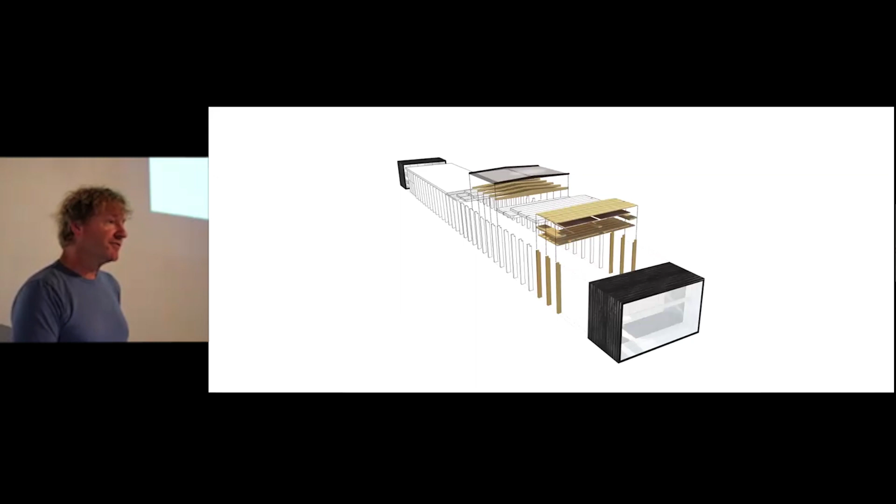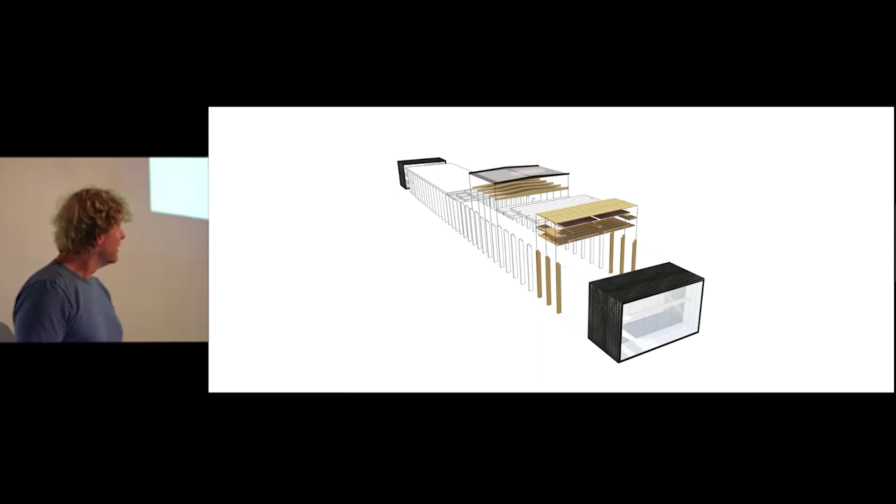It was also the beginning for us of panelization, learning how, in this case, we could build these 12-foot by 30-foot panels offsite, complete with insulation and electrical built in, these very flat, shallow truss-like panels to build a building. And of course, it's not tall.

So at the same time, as I'm lecturing around the world, I end up meeting and honestly totally fall in love with this guy named Andrew Waugh, in an appropriate way, especially because Andrew's daughter's here. Andrew became an incredibly good friend of mine, and he was lecturing alongside me, talking about wood.

In 2008, 2009, he built this building, which is the first tall wood building, a modern tall wood building, and a really important milestone. It was built using Austrian wood. Andrew's coming to tell this story, so I won't tell too much about it, but it was a really instrumental moment for the industry. For me personally, it was the beginning of both our friendship and our relationship, but also an understanding that we were already starting to explore tall, but in a very different way than Andrew was.

This building is built as a platform-based building, meaning the floors go on and then the walls, and the floors go on and then the walls. That's kind of how we build wood frame construction. But I live in an earthquake zone, right? The West Coast is a heavy earthquake zone. And that system of building wasn't going to work for us as we went higher than 6 to 8, 9 stories. So we knew we had to come up with a very different system in order to build in our seismic zone.

That was what began this book we call The Case for Tall Wood Buildings, explaining the reason why we should build it. And we developed this system that was balloon frame, meaning the walls go up many floors and the floors are hung between, which becomes really important as you go taller and taller, because wood shrinks.

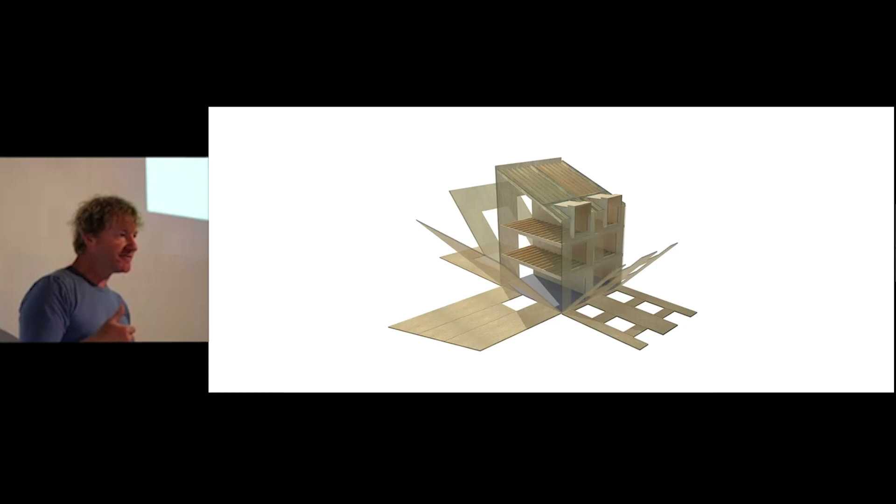So we wanted to say that this material - apologies to the Skyscraper Museum, but we're going to get there - we wanted to show this idea of FFTT, that these systems of building using CLT would work at all different heights and have a reason at all different heights. This was a chance to say in an institutional building that needs to last for generations, CLT made sense. So we tilted up these walls vertically, like again a balloon frame, and then hung floors of light wood frame to keep the cost down because it wasn't tall.

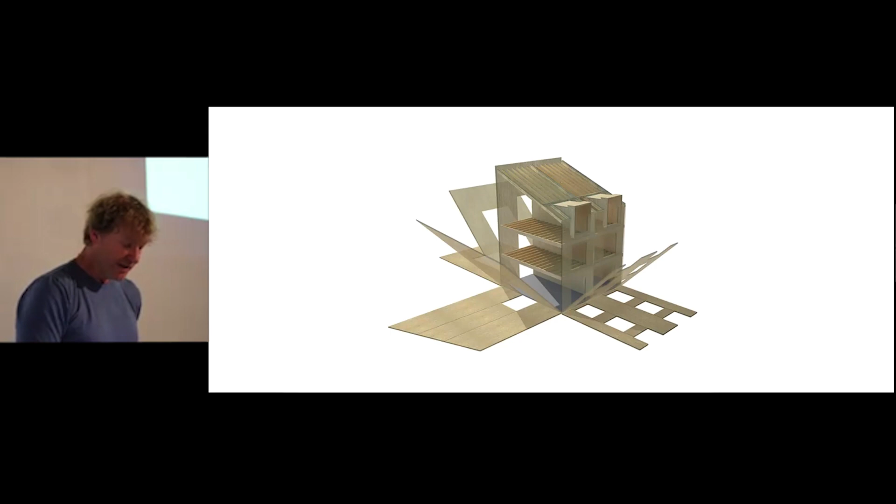For us, this was a very instrumental turning point of understanding that these systems could be economical. We could actually achieve them and achieve the architecture we wanted, including brick on the outside. So we weren't married only to the idea of putting wood on the outside of a wood building.

But then it came to this big question. A bunch of people in the room are starting to really germinate on how we're going to get this movement to work. And I'm sure those like Thomas and others in the room that have experienced this - everybody says that can't be done, our industry is a massive ship that cannot be turned, there's no changing the way. The industry largely hasn't seen any major innovation in a century. It's kind of embarrassing - every other industry sees massive innovation. We pretty much built buildings the way we did a century ago. And yet we are so responsible for so many important issues, from social to climate and so forth.

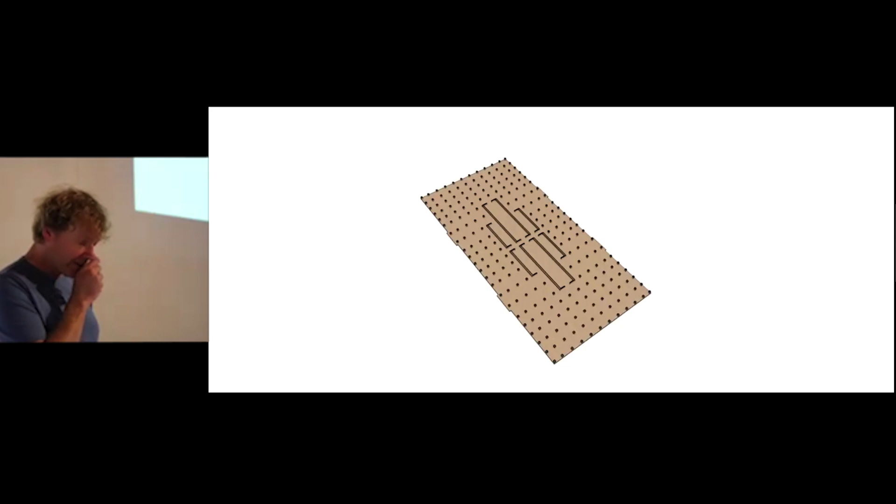So turning the ship became the big question of how to do it. And there was a real life lesson in it - that was to find tools to tell the story. We were approached by a Finnish company, Metsä, who make laminated veneer lumber. They asked us, as part of their program, saying we'll pay you a bit of money.

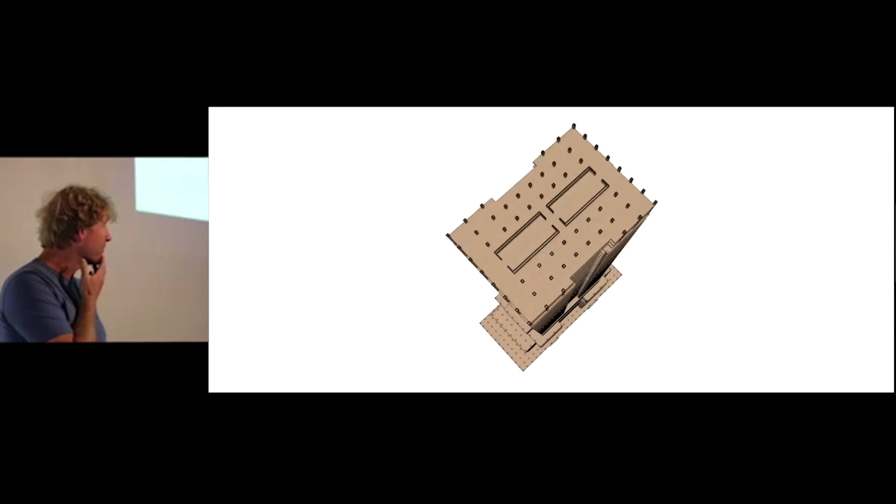Could you sit down with your engineer, Eric Karsh, who's going to speak as well. He's a very important engineer, a good friend of ours - he shares office space with us in Vancouver.

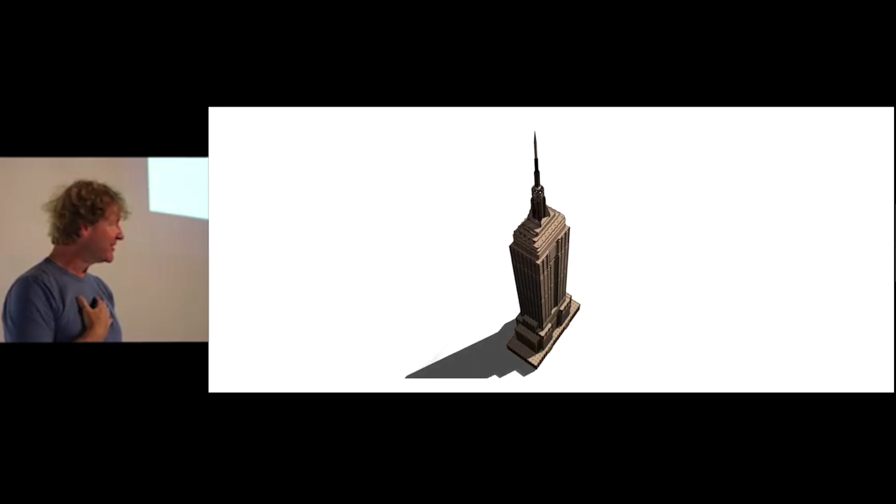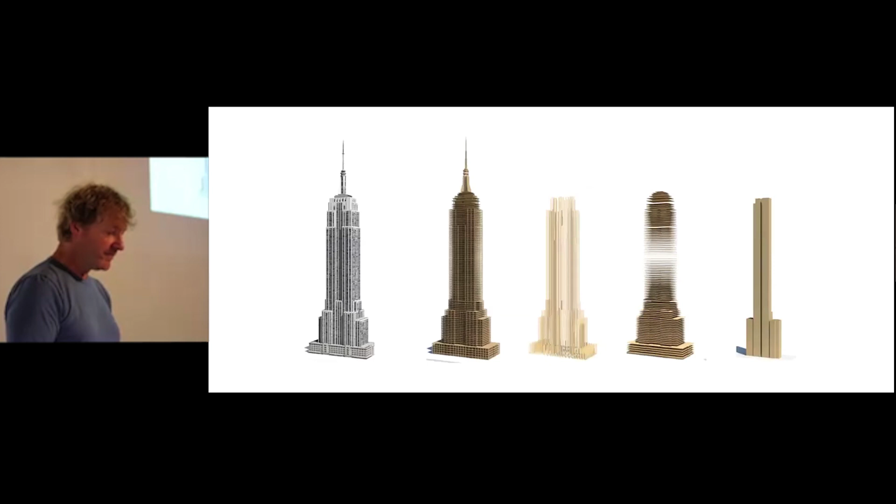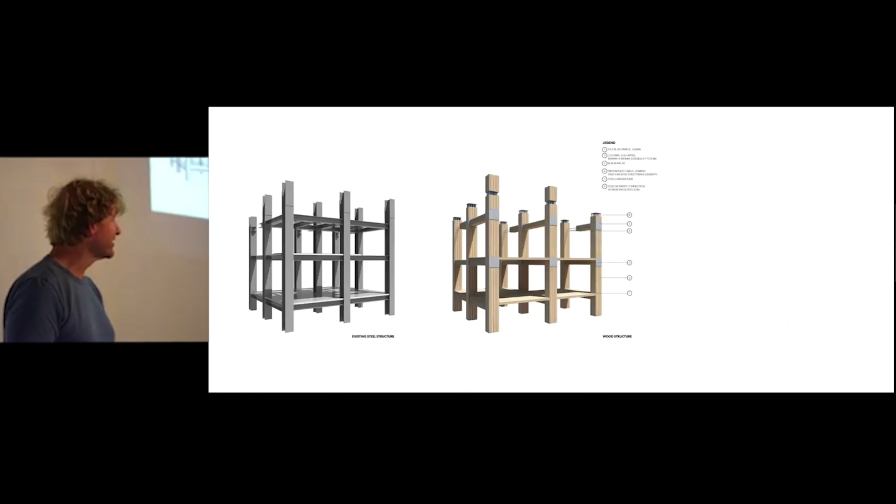Could you have built the Empire State Building entirely in wood? What we found is we definitely could have, which is kind of crazy to think about. We did a pretty detailed engineering exercise to prove it out, coming up with a concept of post-tensioning laminated veneer lumber sections. We did pretty detailed drawings of it, and in that process, what it allowed us to do was talk to the mainstream.

The big thing about skyscrapers, the reason this is such an important part of this movement, is that it's not just about tall, it's about more, it's about bigger, it's about more urban. The breakthrough of any new technology has to be inspiration. It has to stretch your imagination of possibility, and tall does that. When you want to build a 10-story building with this new technology, it's still scary for people until you realize somebody built 60 stories. All of a sudden that takes the fear away. There's a whole history of how this worked, even in the beginning of skyscrapers a century ago.

In my TED Talk, I'll talk about how people were terrified to walk under a 10-story building, the first tall building in Chicago, because they'd never seen anything like it. So that fear is something we had to overcome. Tall was a way we could show that if we could build the Empire State Building, if we could show with some real examples, like we see in the room here, then we could actually get people really comfortable with any other height with this material.

The breakthrough is going to be about tall, and really the inspiration of the dialogue between the Chrysler Building and the Empire State, and the competition, the spirit that developers feel about being a little bit taller, and all of the things that this museum are about, is really what also pushes innovation, pushes engineering higher and higher, to create this great comfort with change. These tools for us to be able to tell the story became really important, with cute little things that help get the everyday person kind of adjusting to it.

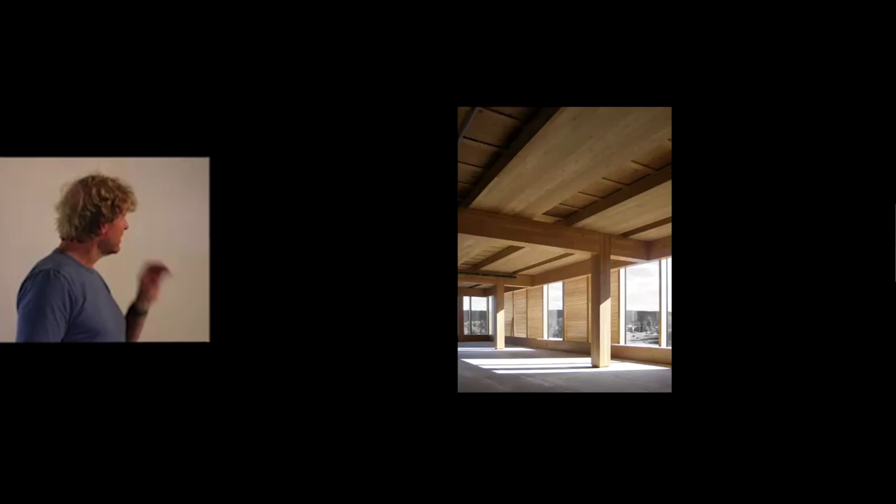And we developed a system of staggering CLT that allowed us to hide all the services in the building's floor sandwich, which was really cool, except we've never actually done it again. But it taught us a lot of lessons. Part of the lessons are these buildings are different.

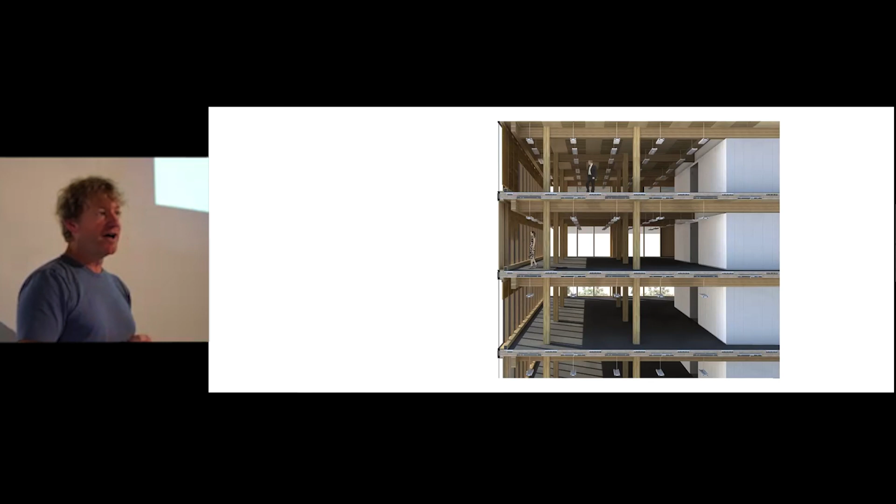The process is different. You're not saying to the engineer, make the structure, and then saying to the mechanical, figure that out. It's day one with structural, mechanical, electrical in the room, collaborating to figure out how all those things work together, because you want to show off the beauty of that material. This was the first building for us to really deeply understand how integrating into the structural system meant that...

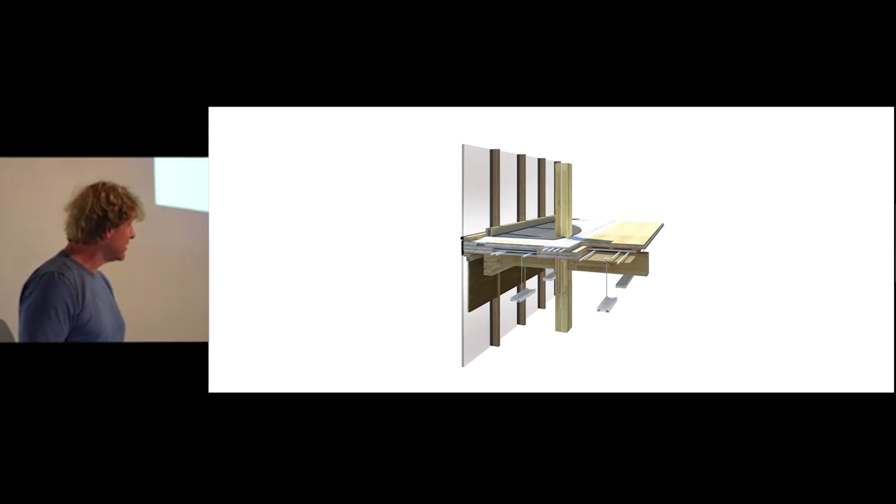...we were actually thinner as a sandwich than a conventional concrete building. But we could do it in a much more beautiful way, and obviously a much more impactful way from a climate point of view. Even the core CLT, this is the first use of CLT made in British Columbia. And even the exterior is wood, which is really unusual. We actually charred the wood in the Japanese technique to prove that the flame spread on the building would match steel or a non-combustible exterior, which it barely did, but it did.

What we found, though, is more important, which is we did a bunch of studies and we found that it was an 88% reduction of carbon over doing it in concrete. And we now have, and the North American forest grows enough wood to build it in 4 minutes, and those are really great storytelling devices, but that 88% is the point.

So as Carol mentioned, I ended up getting this request to speak at TED. The single most terrifying thing I've ever done. Bill Gates was in the front row, down in the shadows there. And yet it was also the single most important thing for us as a practice, but also in this movement, because there's very few ways architects get to tell a story that can reach this many people.

The piece I didn't really understand is the importance of translation. TED has volunteers that do all the translation, and it's random what countries or languages they translate it to. But my talk's in like 40 languages now. I had translators come up to me at subsequent TEDs - one woman said, Michael, I translated your talk into Albanian, and now we teach about wood architecture in Albanian architecture schools. You realize the power of language is so important. This has largely been an English language conversation, but TED opened it up to the world and to many more people, which was really huge.

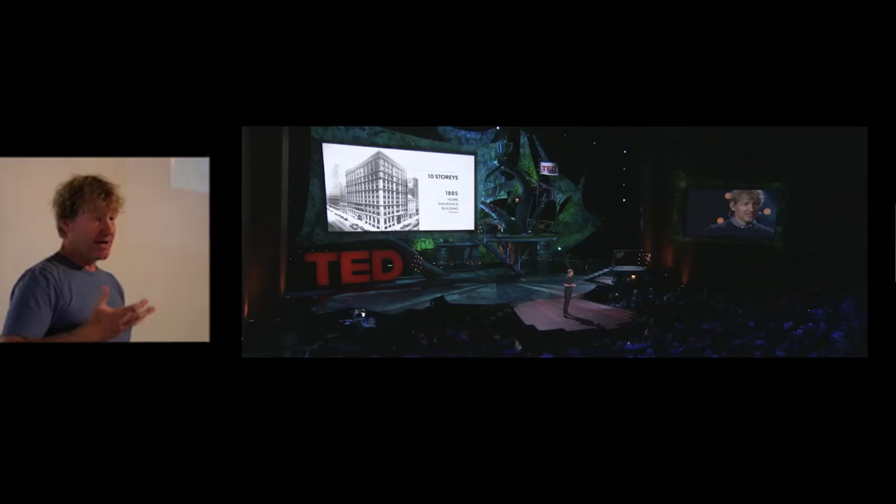So as a movement, it was really helpful. And Carol mentioned, as a Cornell grad, I used this Roosevelt Island project I knew they were about to build to suggest that if you're going to build a high-tech campus in New York City on Roosevelt Island, you need to build in the most technologically advanced material on Earth, which is wood. It always pisses humans off that we don't have a patent on this material - that's the way I tell the story, and it's so true. Mother Nature is so much more sophisticated than we are. So I use these as just examples, and they didn't go anywhere.

And I talked a lot to New York as a city, tried to talk to Bloomberg's office at the time, and because of fire, it was largely a non-starter conversation, unlike Paris. So the mayor of Paris at that time started asking me to come over and speak a lot in Paris. Why that really mattered was Paris had always been historically the number one tourist destination in Europe. But around that time, London had been investing so much money into culture that London had flipped the story and become the number one tourist destination. So Paris was kind of desperate to figure out what are we going to do different. And they also hosted COP21.

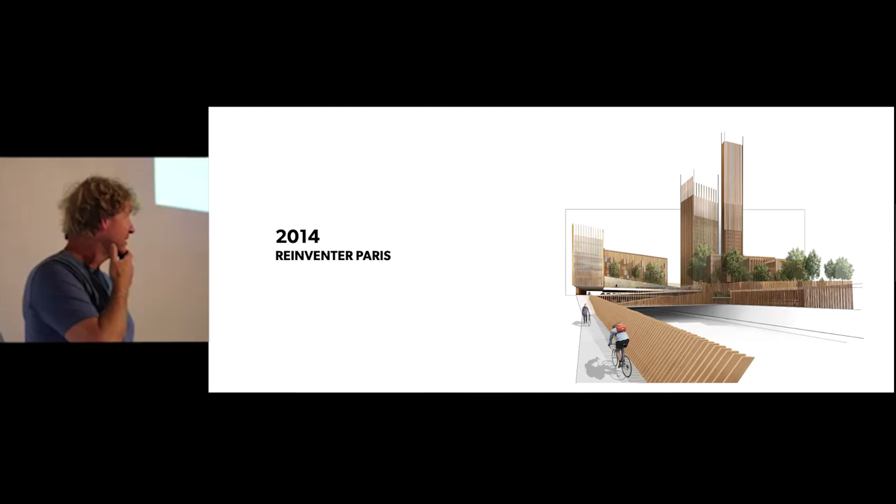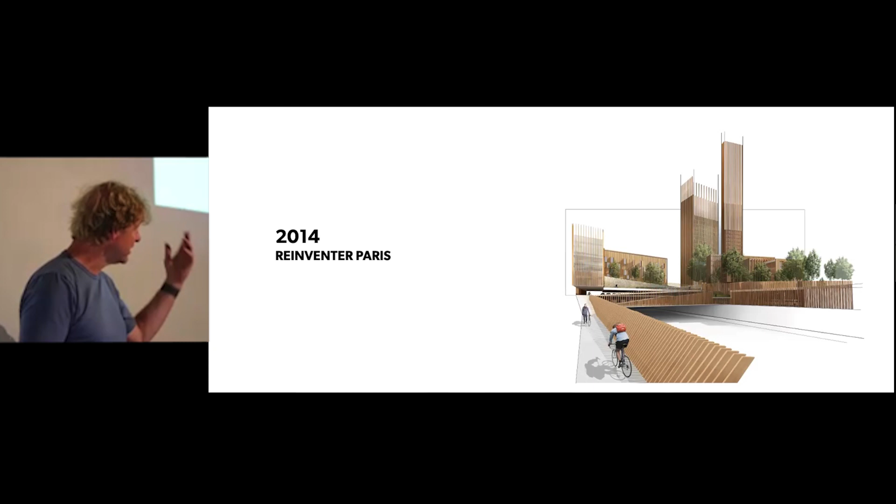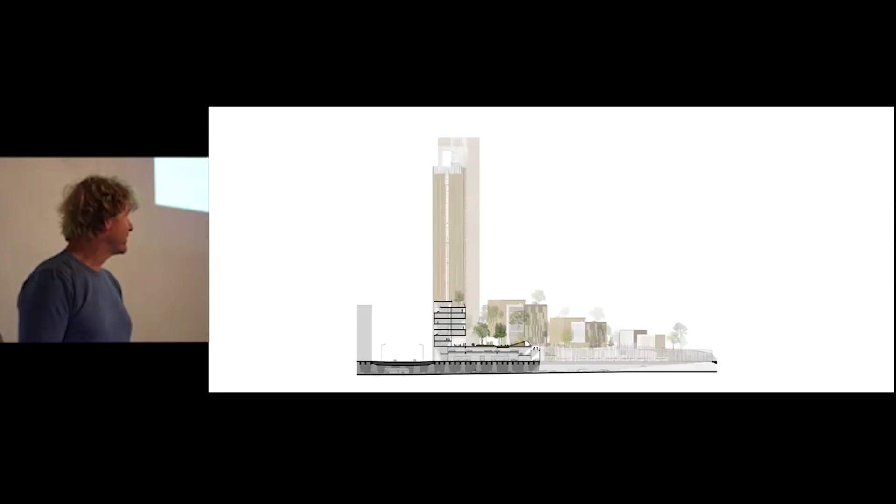So when COP21 happened, they started thinking about how this idea of building in wood could be part of the story. We submitted a competition entry for this crazy tall 34-story building. We did not win - you can see the Eiffel Tower in there. But for us, it was the beginning of being able to show in pretty good detail designs that would get us stretched up into these huge heights. The little blob on the top there is the Eiffel Tower. This was built spanning the periphery, the main highway that loops around Paris. It was a pretty crazy big project. But we didn't win, and it kind of scared the hell out of Paris.

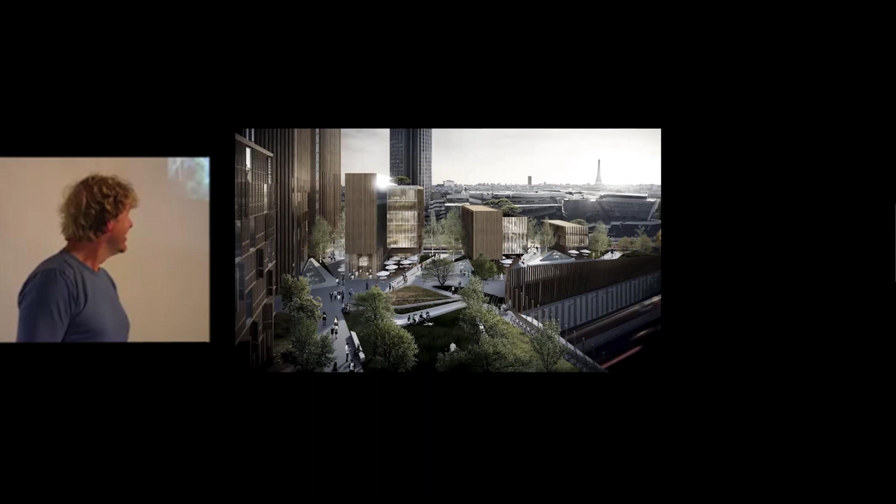But enough that Paris decided this is going to be a thing. And I would argue that for the most part, they're building more mass timber than anywhere on Earth right now, even though they have wood there. So it's ironic that when you politically have that momentum, it means that you actually see change happen, which is what we're missing in a lot of the rest of the world.

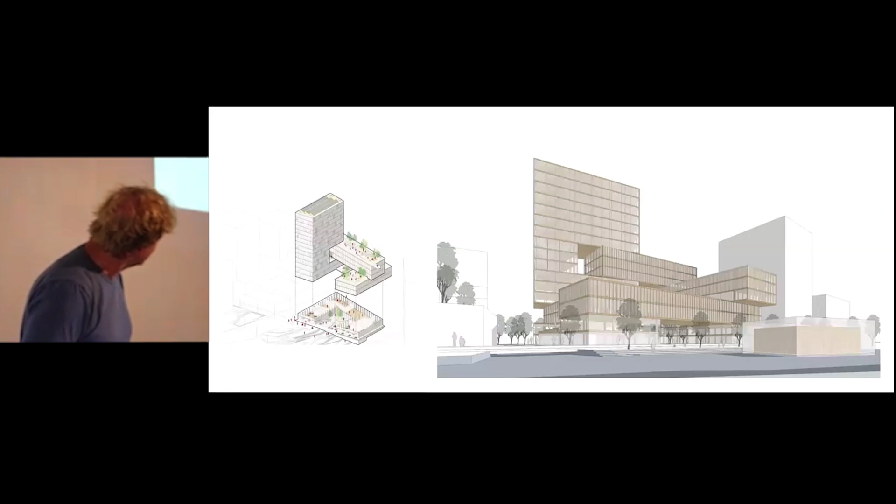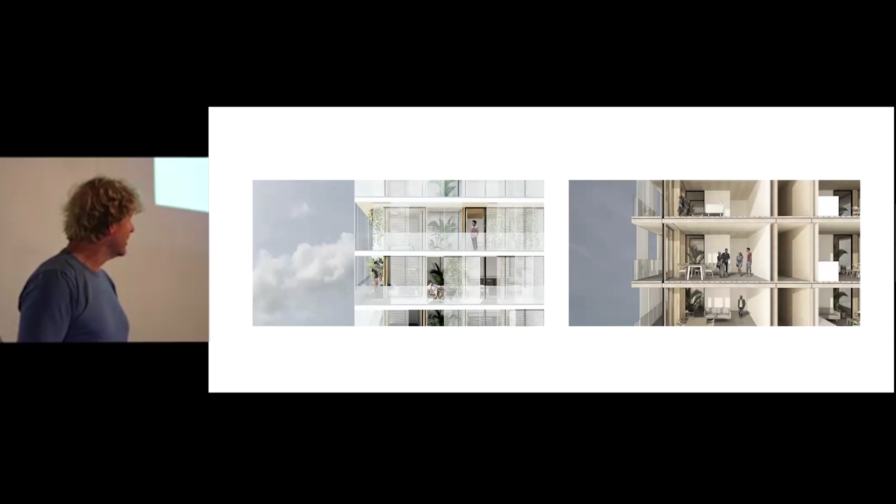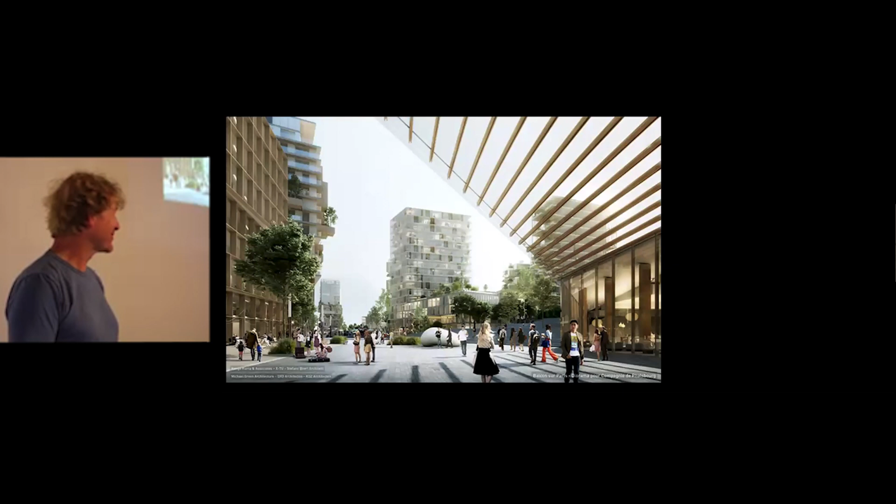The next project we'll show really quickly here is what we call T3. This was the first building we did for Hines that became part of the T3 portfolio that Hines has. This is in Minneapolis - a very economical office building. Amazon moved in. Hines did really well and decided to build a lot more of them. Probably some people in the room - I know Tony's doing one - I don't know who else are doing T3s.

It's kind of crazy to think that at this point, Hines was really scared of this idea. Now I think it's one of their most popular building technologies.

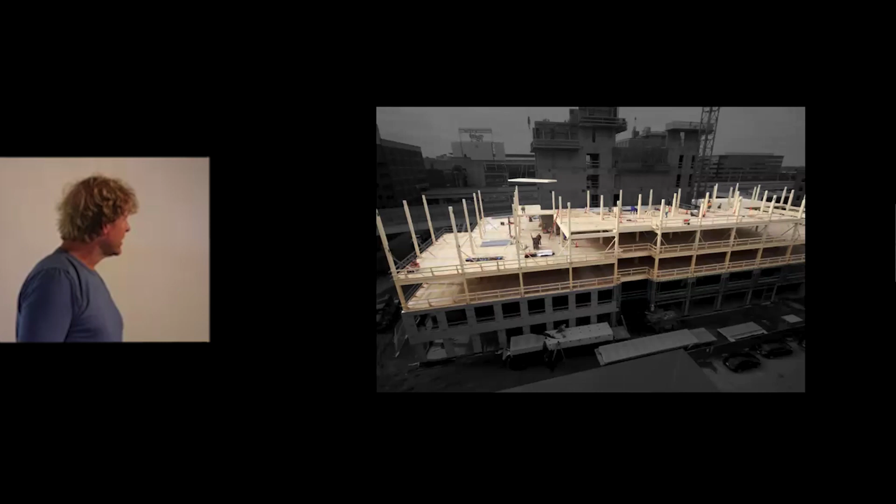We ended up building it in nail lam, just nailing together dimensional 2x8s, because that was the most economical thing. What was really crazy is the cheapest bidder to build this building came from Vancouver. They built a little factory just across the border in Manitoba, built all this structure, and then drove it down to Minneapolis—and they were cheaper than anybody locally could build this, which is insane. But that's because the industry and contractors at the time were just scared of change. They wouldn't know.

It was hugely successful for Hines, and for us it was good fun. It also shows these buildings don't have to be complicated architecturally to be really powerful. This is a really simple, economical building with corrugated Corten on the outside. Yet I meet people all the time who work in this building and send me emails about how much they love it. It's the only building I've ever built that I get that much feedback on, and it's pretty cool that that's true.

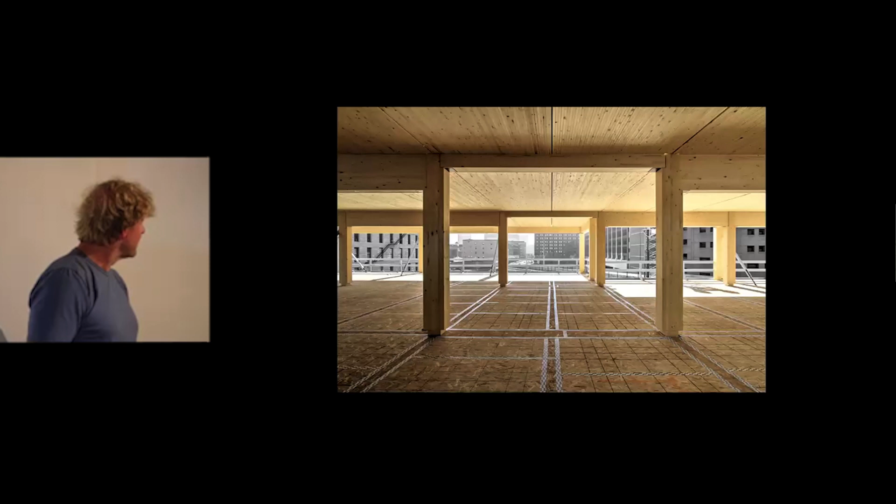It shows to me that even really economical solutions in timber are really viable for people that love them. There are so many technical lessons I could tell on every project—I apologize, I'm on the fly—but these are just the stepping stones as we go higher in the city.

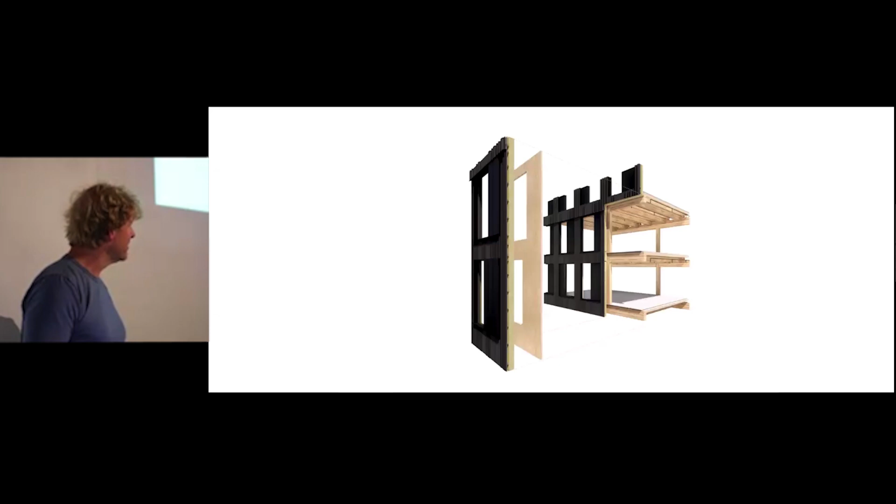This is in Spokane, Washington. This building was our first project doing a lot of prefabrication using CLT, offsite, including the exterior facade system that came in 2-story panels that we hung on the outside, pre-insulated and so forth in the factory. It's a combination of university and office as well.

Then we got this project that I never get to talk about, and I'm finally starting to talk about. A high-tech company—that you all can Google—asked us to do a lot of research with them about the idea of building in timber. This building was finished about a year ago. We're just starting to talk about it now, and we'll be much more public in the fall. Google's pretty constrained. It's a very interesting structure in timber for about 1,000 people who work in it.

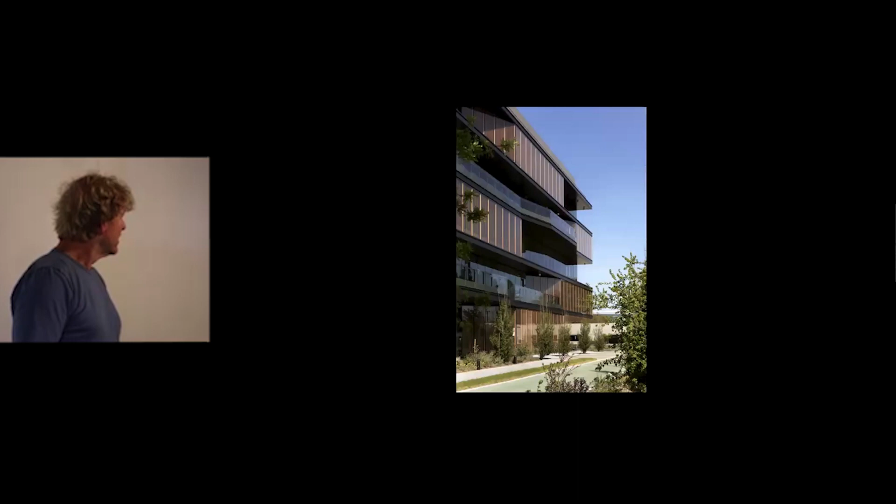The north side of the building is what's called a closed cavity facade, so we were really careful with our glazing. This is a facade system that's the first time it's been done in North America—a fully insulated cavity facade with wood louvers that move up and down inside. The north side requires all this daylight, but indirect light, so we manage that with these louvers. The south side is more articulated with smaller rooms, while the north side has very tall spaces.

In the middle there's this atrium space, all timber obviously, with a skylight in the middle, and these beautiful, elegant, simple connections but huge in scale. The floor to floor is 30 feet—it's huge, hard to see in photos to understand the scale of this space. But we're really, really proud of it, for a whole bunch of reasons.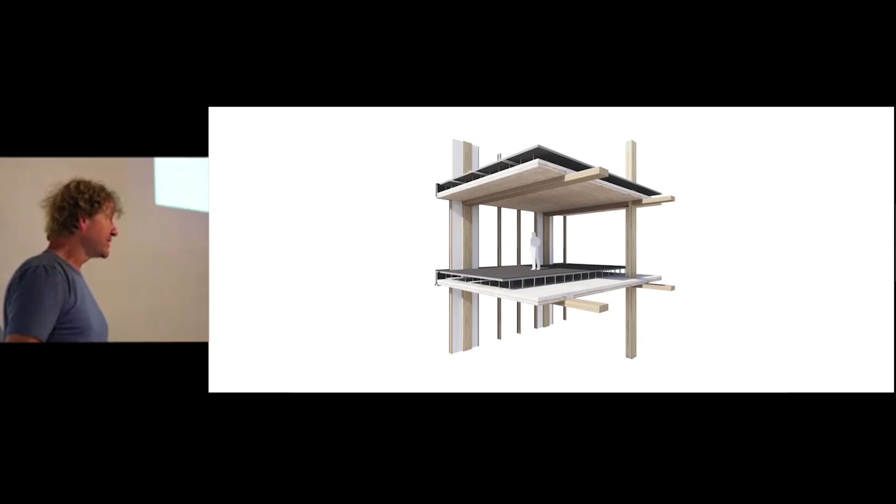It has a raised floor, kind of like we're on right now, to deal with all the systems. Some of our buildings have hanging systems above; when you have more money, like Google does, you're able to do everything from below, which means your floor to floor is higher, but you end up getting a much more beautiful wood ceiling as a result. And they really liked it.

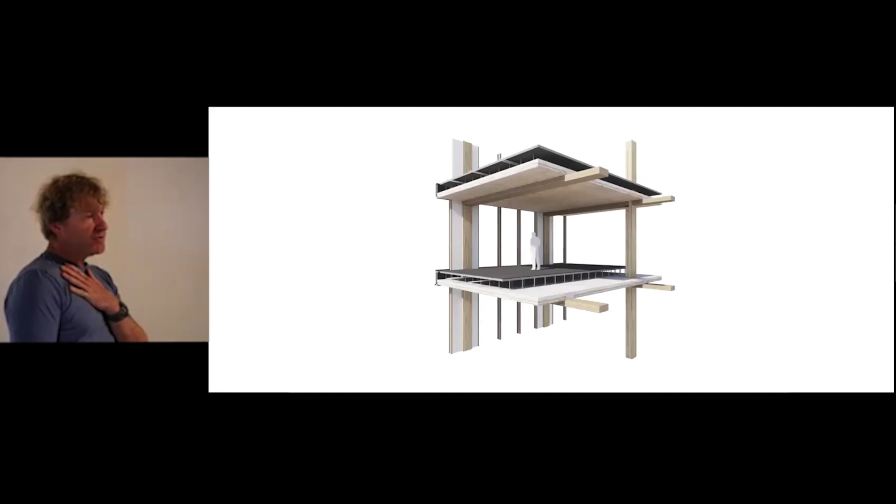They liked this building so much that they're moving one of their most senior teams into it. The head of real estate told us it's their single favorite building they've ever built at Google, and that they will from now on be building in timber. I don't think I can officially say that—they may change their mind—but that's what's trending. That's what this means to people, and I think it can move the dial in this conversation, in the global conversation of what matters.

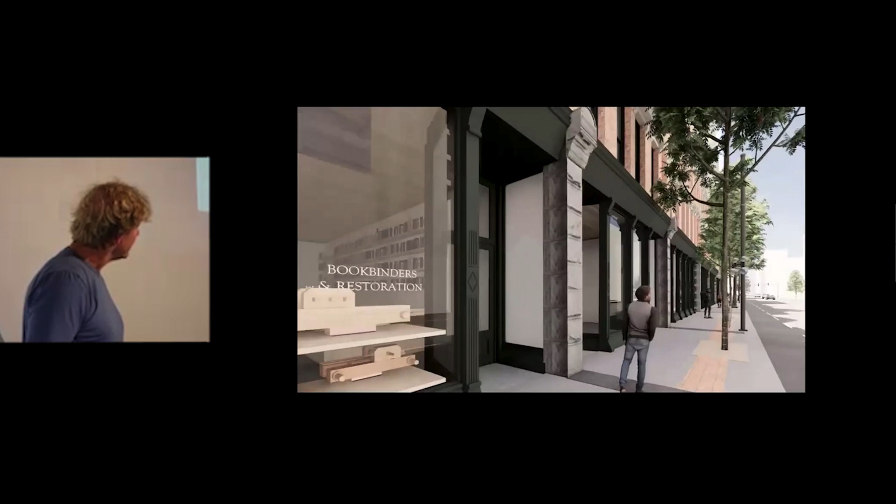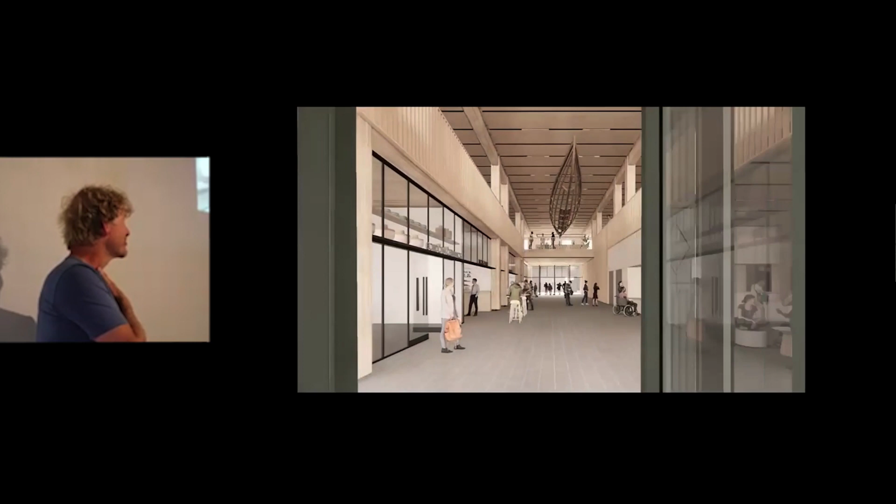That's Vancouver. This is a little video of the historic building we're working on right now, where we're going to build 12 stories of office and university above this historic building, and then what was in that drawing, the 18-story residential building, is currently starting to head upwards around the 30-story.

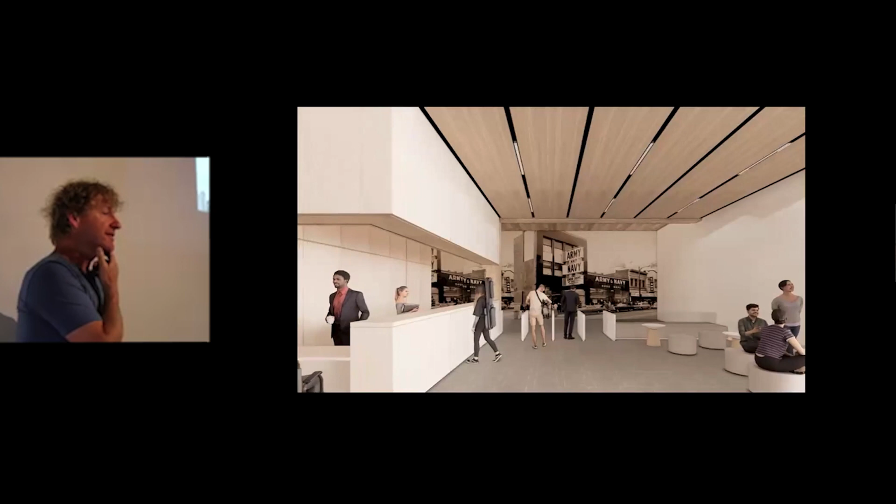But because of what's happening in the economy, there's now huge pressure with the developer wanting to push back and end up doing the tower in concrete. So we don't know what's going to happen. This is the university piece, and that's Vancouver's mountains in the distance there in the water.

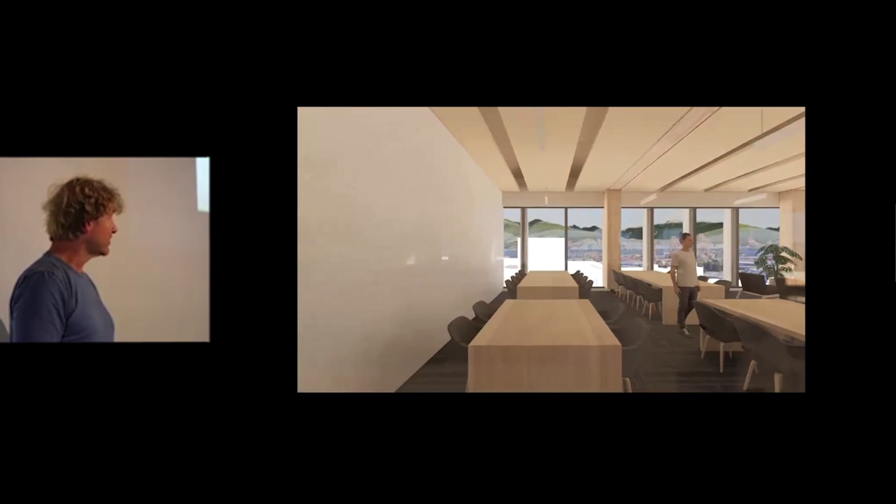But again, what's nice is we're seeing the users of these buildings not just be residential, not just be office, but we're seeing academic users and a whole bunch of other users. I'm going to jump forward a couple more, not too many more here, then we'll jump into the conversation.

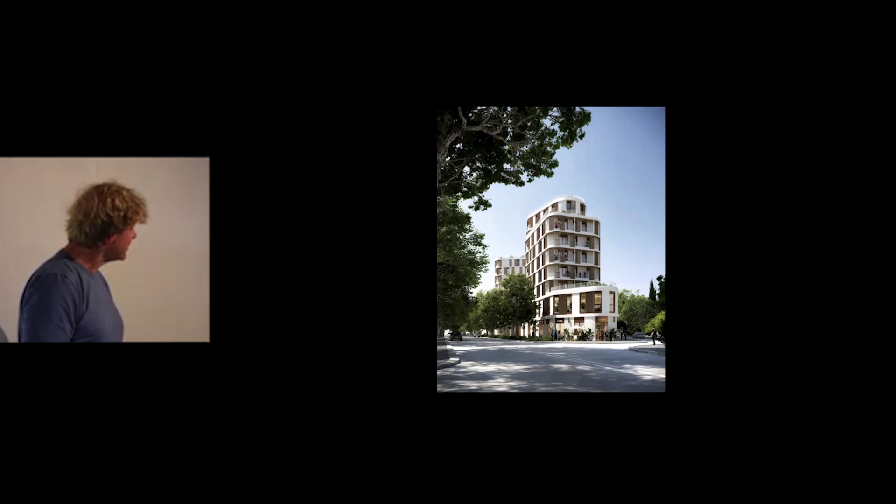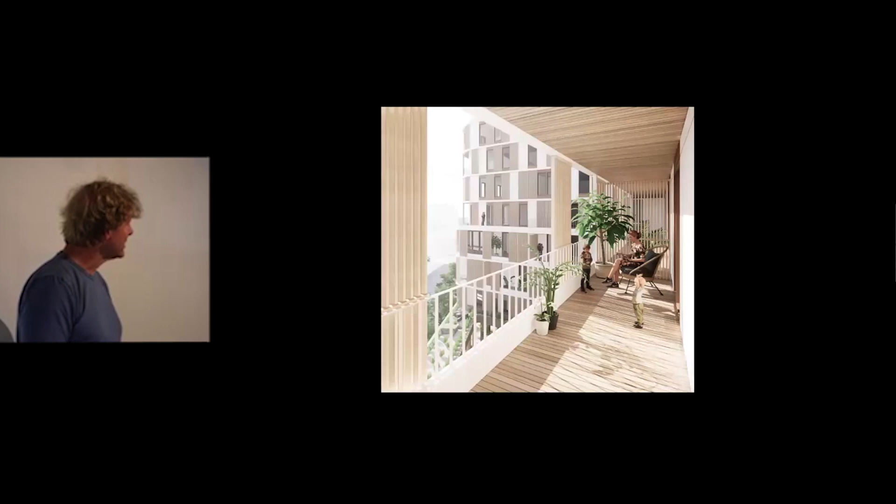France is fascinating. One thing I love about France is in their building code, they require every building, every residence unit, to have two aspects so they get crossflow. Whereas in North America we end up building a lot of single-face units, and you open a window and the air doesn't flow, they require two directions so you get cross-flow air and reduce the heat load in the spaces. But it's weird because it means you end up with a lot more cores and it's a very different structure.

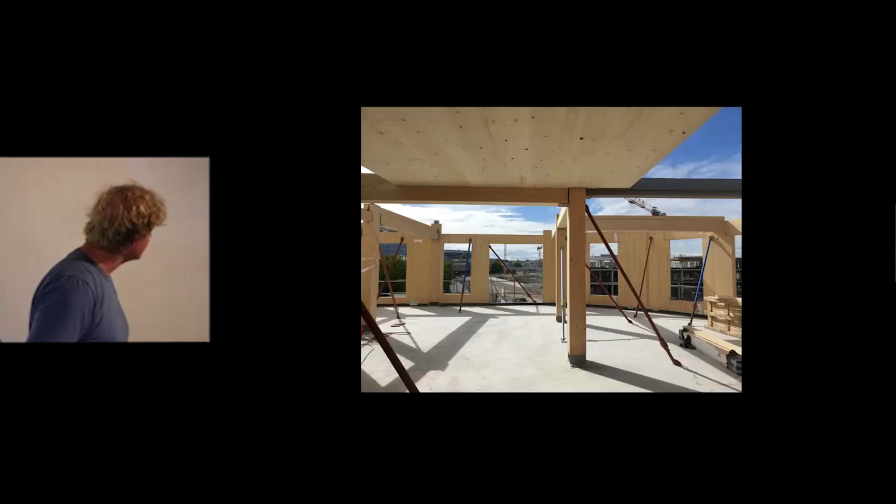So I mentioned earlier that Andrew's buildings are mostly platform-based buildings, and that's really common in Europe—it makes total sense. We just don't build that way because it's not super economical for us to do it that way here. This building is platform-based, so it's our first one built in the European style. That means you're seeing more interior walls made of CLT. I think you can see them in some other construction photos.

So as I say, that building just got finished. It's our first finished project in Paris, so we're pretty excited about it.

This project I'm also not usually allowed to talk about, but I'm starting to. It's just finished core and shell, just finished construction. It's for a similar tech company as the last one, I'll say. It's a big building—again not super tall, although the floor to floor is tall.

But what's interesting is even though this is within a 3-minute walk of the other project I showed you, it's a very different structure. And again, this points out the number of different types of mass timber we've built with—the number of different structural approaches is enormous. I think we've built 50 mass timber buildings or something, and in that range, very few are identical because we're always looking for the most economical or appropriate solution.

In this case, they're big gathering performance spaces that have one unique structural system, like this grid shell. In other parts of this building—the building was pre-entitled for a different tech company 10 years ago—we were stuck with certain heights, and doing those heights in mass timber can be hard because the beam depths needed for long spans for the office use they wanted can be really hard to achieve.

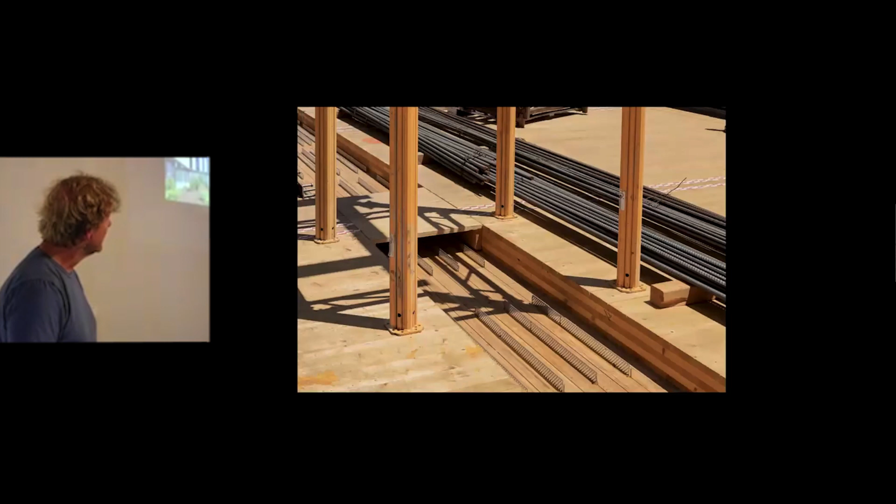So we hybridized it. There's a big conversation and debate about pure wood versus hybrid. In this case, we hybridized it and squeezed in a whole extra floor, which is huge for them. Those sort of subtle techniques can be dramatically different on the pro forma of the project. It's all terracotta on the outside. This is the hybrid system—we're using a system that basically bonds concrete to the top of the CLT, creating this shallower span, which again allowed us to add a whole extra floor.

So I mentioned Andrew Waugh a few times in the talk, and like I said, Andrew has become a really good friend of mine. I'm going to see him in a couple of days in Munich. Our firms are kind of working more and more closely together, especially up and down the East Coast. We're starting to work together is our goal.

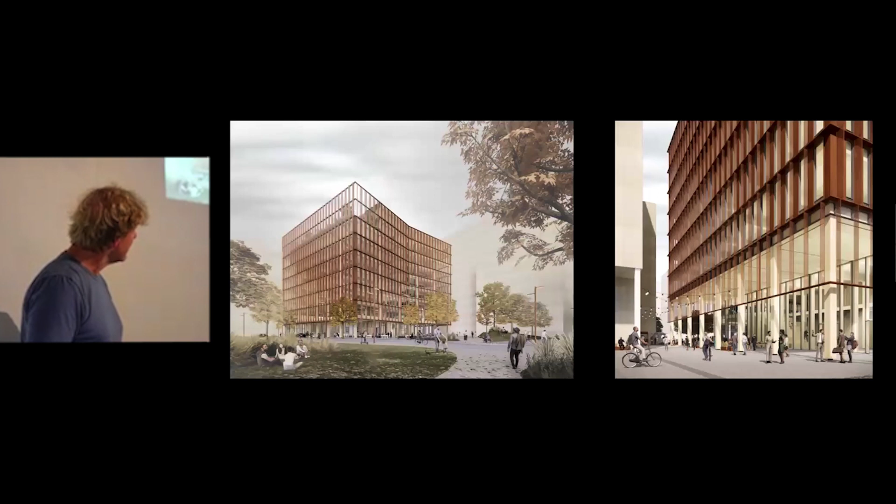But this is a project in London that we collaborated on. This was for a developer, and it was our first collaboration of the type, but we're still values aligned. I think that's the thing, this is a small community. Rather than competing with each other, we need to find ways to collaborate a lot to just keep pushing this, because we're such a small group of leading voices to push the agenda. I think more collaboration is better.

I see a lot of fanning. That's good because we're at the end.

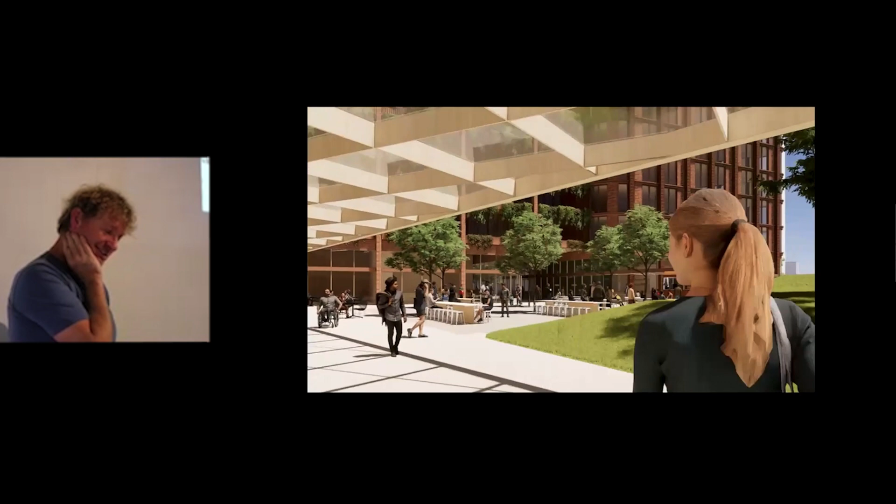I'm gonna end with this, which is 55 stories. Hopefully it's several buildings. It's 1.2 million square feet. We should know any day now whether this is a go. But I think it will be.

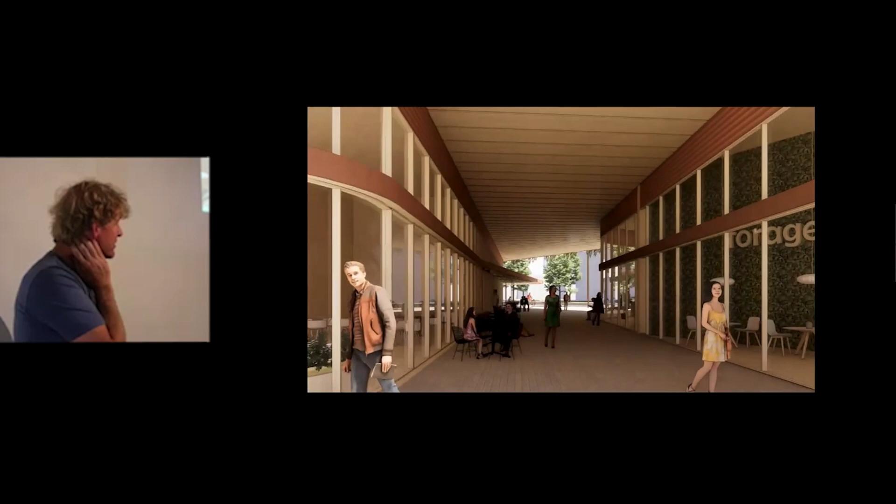And this is very big, all timber. Here in the US, can't say where. 3 towers, including a hotel, office, residential, and this will be our biggest one.

This design you're seeing will change a lot. It's literally the initial design for winning the competition. And we won. So now we just need to get confirmation that it's going to go forward with the city. So we feel really good about it.

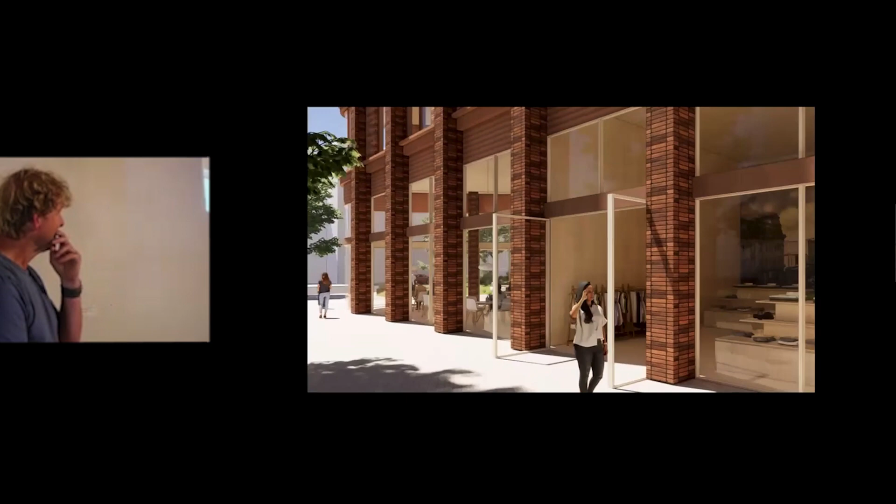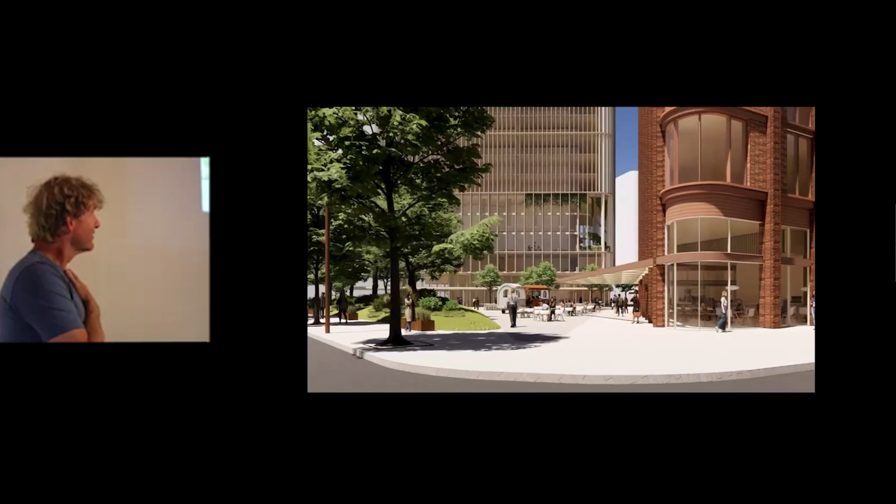I think we're going to all see a lot more of these kinds of projects. And why this matters, and it's ironic, this video doesn't really show up the tower very quickly, partially because it's unresolved design. I think maybe you get a hint in a second. This is when 3D modeling is doing the sketching for us. There you go, start to see the height. It's big, it's very big, it's very dense on its site.

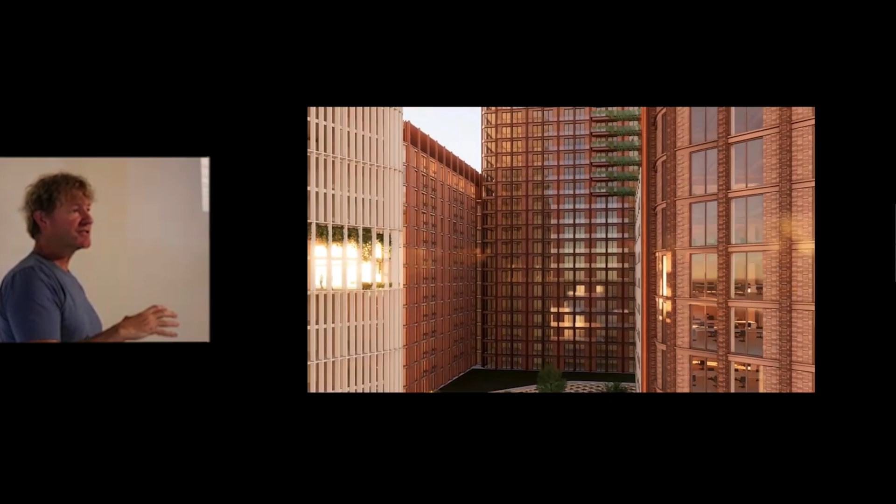But what I think this speaks to is the importance of height, right? Again, when we build this, or somebody else builds this, or some of you guys in the room build this scale, it starts to erase the fear of change. And it starts to build the industry's capacity to do this in a cost competitive way. I think that's critically important, which is the importance of skyscrapers in general.

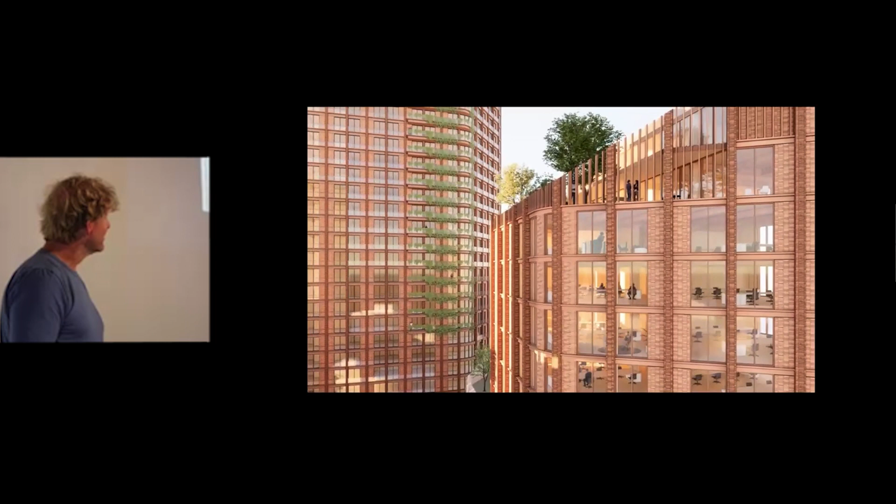So we'll see if this goes, but I think it will. That building on the left, the hotel, our partners on this are very, very positive about it. We're already doing a big timber building for them, and they're really committed. So I think this certainly won't change structures. It's more just a question of whether we get quite that big.

So 2 last slides. We do have a new edition of this book coming out. And why this matters, this isn't about us at all. This book is really about everybody else in the industry that's doing this. This will be our 3rd edition, 3rd complete transformation of the book. But the idea is to capture what's happening globally in the industry and really celebrate it.

We'll keep doing these for a while. It's a great way to not make money. And yet it's really, really important.

Birkhäuser is our publisher, a Swiss publisher that I love, I think they make the best technical books out there for architects. But when Ria Stein, our editor, and I first chatted like 12 years ago about this book, she said to me, yeah, that doesn't really sound like something anybody would be interested in. But we can do a small run and see how it goes, but we won't really promote it, it won't really matter. When I started flying out to come to this, she called and said, can you make sure to promote the next book? We're sold out already. We need to do another one.

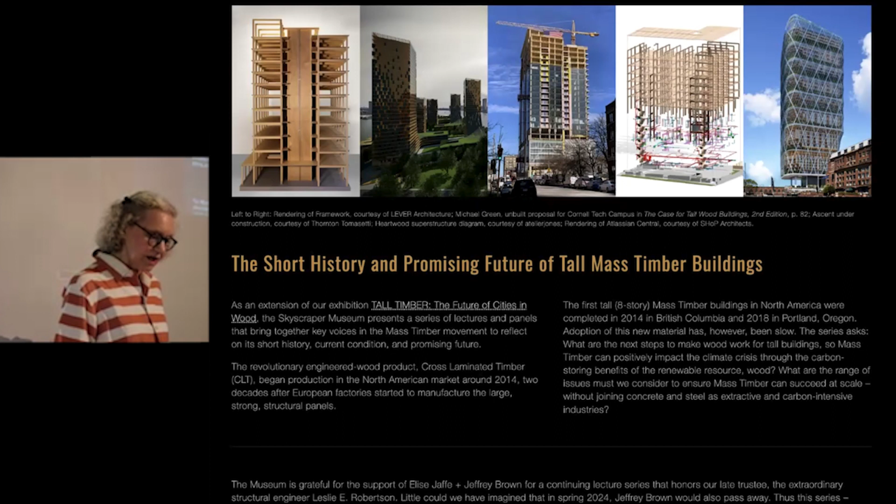Here's the overview for this lecture series. So, a short history, concise and really small, identifiable in the figures who really have made a difference in advancing the ideas of mass timber as a material, as an industrialized material, as a biophilic material, and as a material that solves and helps to solve the problems of the climate crisis, which is the larger context for this exhibition and underpins the urgency of these issues.

People who have spoken already in the series, which began with Chris Sharples and Thomas Robinson, who's sitting in the middle over there, talked about, because I asked them to, the beginnings and the bicoastal beginnings with the models that are in these two cases, the winners of the competition, the Tall Wood Buildings Prize back in 2014. They showed their work, and Michael is the second of the lecturers, the architects talking about their work in the perspective of this decade or so of their experiments, their prototypes, and their aspirations to expand the world of mass timber.

On June 4th, Susan Jones will be joining us, and it's important to note the importance of regionalism, because Michael is from Vancouver, Susan Jones is from Seattle, and Thomas Robinson is from Portland, Oregon. That ethos of the forest, as well as the aesthetic of timber, is deeply embedded in those regions, and that's one of the issues we look at in the exhibition.

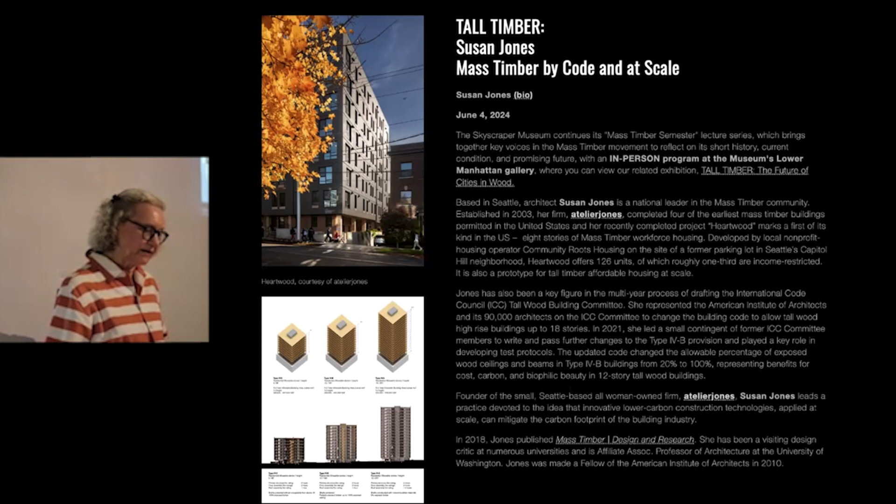Another issue is the role of academics. In the June 25th lecture and panel program, we're bringing together Alan Organschi as well as David Lewis to talk about their work, but also to talk about the academic milieu, the kind of front of academic research at Yale and at the New School, in conferences that brought together a lot of the figures who will speak again in this series and be able to reflect on the history.

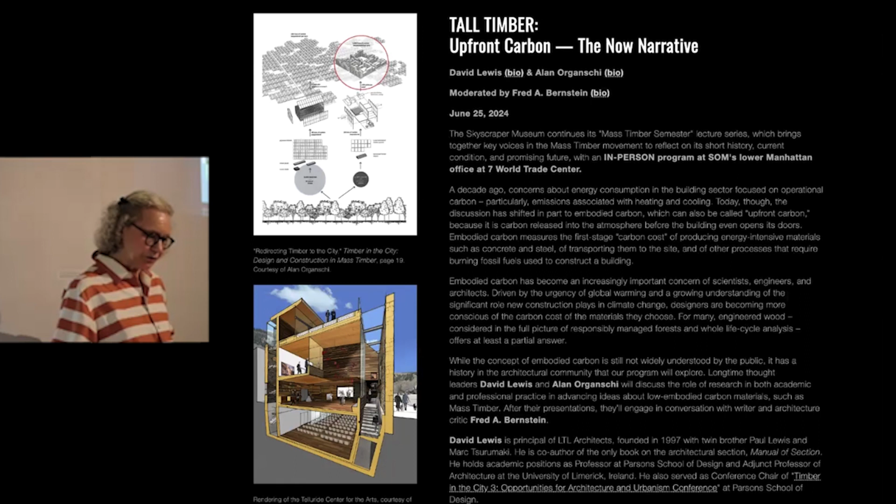Back in 2014 and 2015, at the very beginnings of Timber in the City, Andrew Bernheimer did an important book based on that work and those conferences at Parsons and the New School. Then the last announced so far of the Tall Timber series is Height and Hybrids, as we ask structural engineers to think about the application of mass timber for truly tall buildings.

Others joining us in the series include Andrew Waugh from London, who will talk about his work and the progress in the evolution of mass timber. Already in this series was the prologue, Designing the Forest, a book by Lindsay Wikstrom, who apologized just a moment ago that she couldn't make it tonight. You can listen to her lecture about her book on our website. Then Michelle Roelofs from Arup and Tanya Luthi from Timberlab gave a kind of Mass Timber 101 primer for those unfamiliar with the material.

But tonight is about Michael Green. I asked Michael to talk about the history, because in our very first email exchange he was kind enough to put together a chronology I was already familiar with. He was prompted by me to do this, covering his early work and continuous focus on high-rise buildings. Michael's history goes back to 2012, and a book that you'll see in a moment.

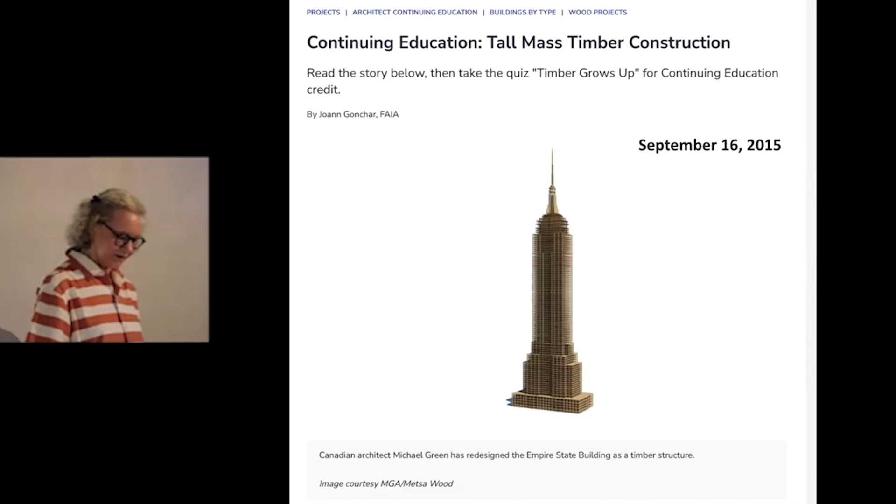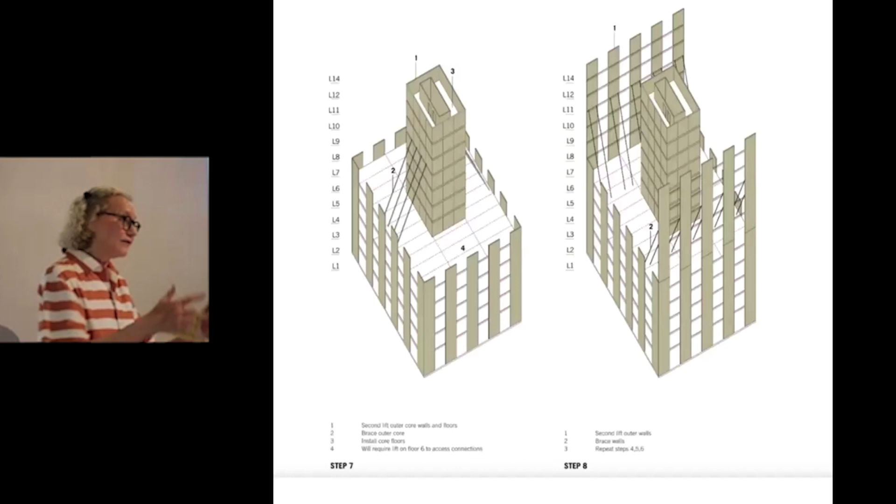But what's clear from over a decade ago is, in these studies illustrating the case for tall wood buildings, his 2012 work published in 2017 in this book, which included that drawing you see there, and his most recent but soon to be reissued Tall Wood Buildings book, bringing his work up to date.

In this span of inquiry, the buildings Michael has completed are mostly, I won't call them small, but multi-story. A continuous theme throughout his work, as I've seen it and as I've read in Joann's many articles and reports digging into his work, is an enduring interest in the tall building. That tall building, and multifamily and multi-story office buildings, is a way to approach urban density, which is the other way to solve the problem of climate crisis.